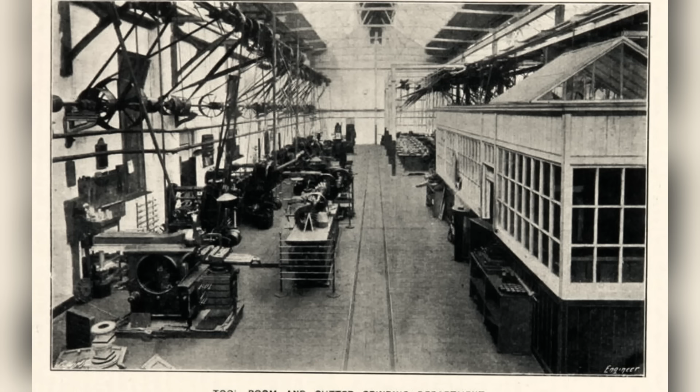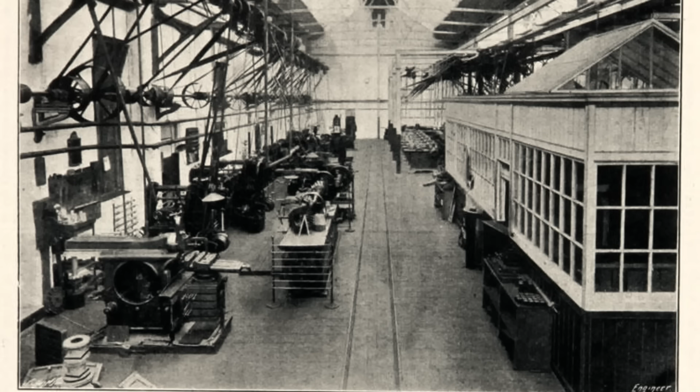Brown cut gear wheel patterns for the foundries around him, and he was good at it. By 1873, he'd narrowed his focus to gear systems. By 1898, nearly 40 years in, the firm had become one of the first in Britain to specialise in machine-cut gears. That sounds like a small thing. It wasn't. A gear cut by machine ran quieter, stronger, and truer than anything a man could file by hand, and the world was filling up fast with machines that needed exactly that: looms, lifts, motor cars, ships.

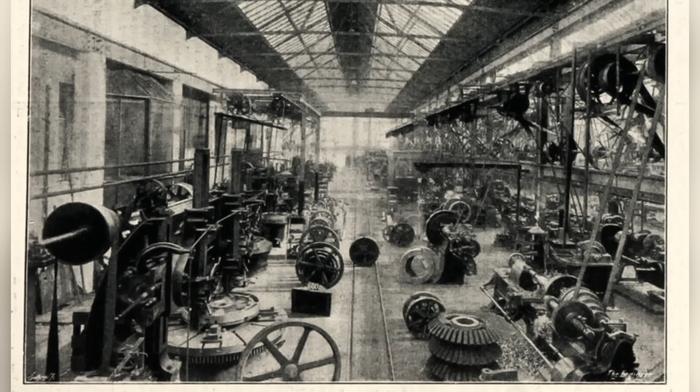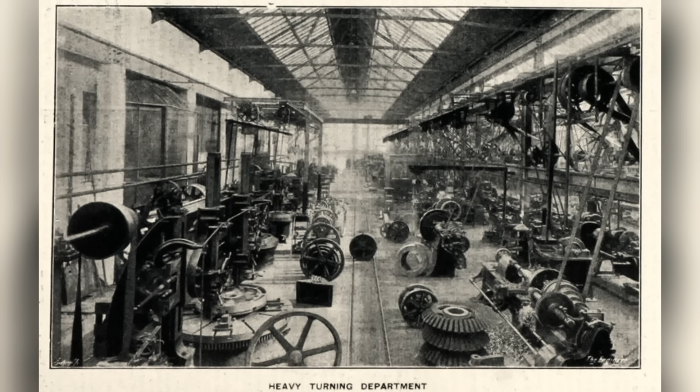In 1902, the company moved to a site on the edge of town called Park Works. It's still there today, more than a century later, and everything that followed - the tractors, the tanks, the sports cars that James Bond would one day drive - grew out of that one stubborn obsession with making a wheel turn smoothly against another wheel. When the founder died, around the turn of the century, his sons Percy and Frank took the business on. They were ambitious men, and they pushed the firm forward. Complete gear units now, and the machines to cut them, and bearings, shafts, worm drives.

The company was prospering, and it was into this family, onto this exact patch of Huddersfield ground, that the man who would build the empire was born. His name, too, was David Brown, the grandson. Born on the 10th of May 1904 at Park Cottage, a house that stood inside the 17-acre Park Works site.

He wasn't born near the works, or in the town the works supported. He was born within its walls. The first sound he ever heard, in all likelihood, was the low hum of his own family's machinery, carried across the yard. His father was Francis Edwin Brown, Frank, a director of the firm, and, in his own right, a real pioneer of machine-cut gearing.

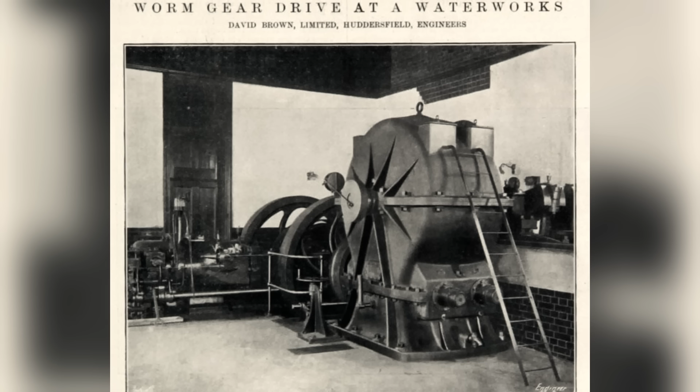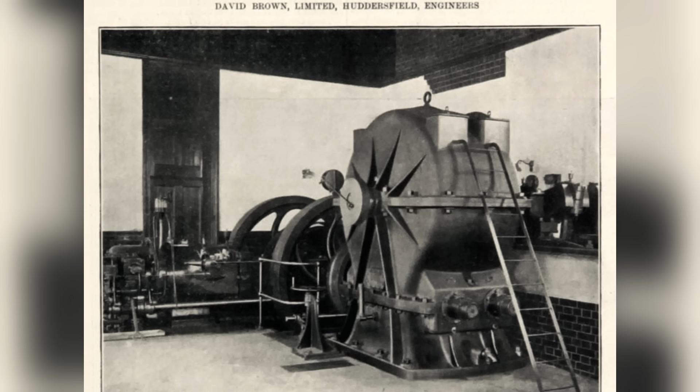His mother was Caroline, born a Brooke, and she was no ordinary Edwardian mother. She was, by repute, the first woman to drive a motor car in Huddersfield, and possibly the second in the whole of Yorkshire. In an age when most women never sat behind a wheel in their lives, young David's mother was out on the roads, hands on the controls. The boy came by his love of machinery honestly, and from both sides of the family.

But the moment that tells you who he would become came when he was very small. The firm, restless as ever, had branched into building its own motor cars, odd little two-stroke machines they called valveless, made between 1908 and 1915. And the engineer who tested them was a man named Frederick Tasker Burgess. Burgess would later help design the engine of the 3-litre Bentley, one of the most celebrated cars of the 1920s. But in those years he was simply the works test driver, and he'd take the founder's grandson out on the runs, the little boy perched beside him on a wooden soapbox seat. Burgess taught him to drive.

The child's legs were too short to reach the pedals, so they bolted blocks of wood to the controls to bring them up to his feet. A boy who learned to drive before he learned his times tables, taught by a man who would build a Bentley. That was the world David Brown grew up inside.

He went to King James's Grammar School in Almondbury, then on to Rossall School over the border in Lancashire, where, in a detail that says everything about him, he bought shares out of his pocket money. Most boys spent their allowance on sweets. This one was quietly building a portfolio.

You'd expect the heir to such a firm to walk straight into a comfortable office. He did the opposite. In 1921, aged just 17, he started at the very bottom, as an apprentice on his own family's shop floor. And he didn't arrive in any chauffeured car. He cycled 6 miles each morning to be at the gates by 7:30, the same as every other apprentice lad, his breath fogging in the cold air coming off the Pennines.

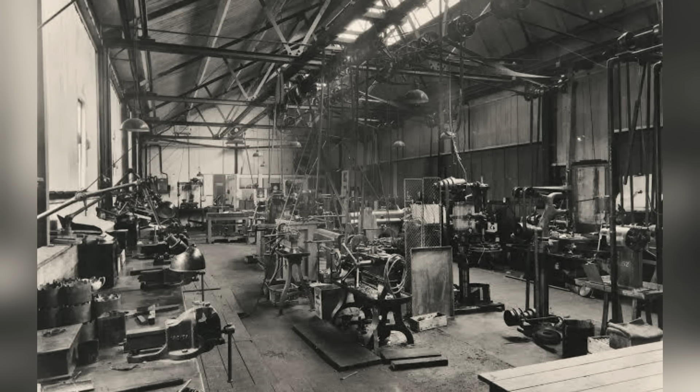Then came the moment that handed him the controls for real. In 1931, his uncle Percy died, and David Brown, at just 27, became managing director. 2 years later, when the joint managing director W.S. Rowe died as well, he took sole command of the entire firm. He was not yet 30, and he ran the lot.

He governed by a single principle, one he'd repeat for the rest of his life: get a good man, and let him get on with it. If he is no good, get another man. But if he is good, support him. It's a plain creed, the kind of thing that fits on the back of a wage packet, but it built one of the great British engineering firms of the 20th century, and it shaped a culture at Huddersfield that lasted for decades. Find brilliant people, trust them, leave them be.

And he was, in every fibre, an adventurer. In time, he'd become a polo player, good enough that a club still competes for a trophy in his name, a joint master of foxhounds, a racehorse breeder whose horse Linwell would one day win the Cheltenham Gold Cup, and a qualified pilot with his own private airfield at Crosland Moor and his own aeroplane. The man could not sit still, but all of that lay ahead.

Because in the middle of the 1930s, David Brown's restless mind landed on a single problem that would change British farming forever, and it arrived in the shape of a difficult, brilliant Irishman.

Chapter 2. The Irishman and the Handshake.

By the mid-1930s, David Brown had bought himself a farm, and a man who runs a gear works and works his own land spends a great deal of time thinking about one machine above all others, the tractor. In 1936, he went into partnership with Harry Ferguson.

Ferguson was a genius. There's no other word that fits. An Ulsterman with a mechanic's hands and an inventor's absolute certainty. He had cracked something nobody had quite solved before: how to make a tractor and its implements behave as a single machine rather than two things lashed together.

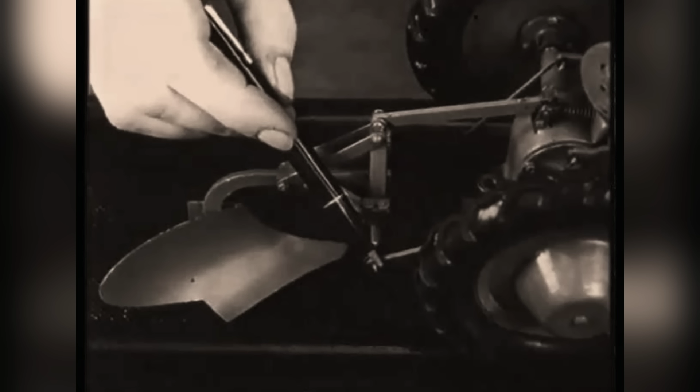What Ferguson didn't have was anyone who could build it properly, at quality, at scale.

What David Brown had was a world-class gearworks and an engineer's instinct for turning an idea into a thing you could sell by the thousand. So the two men joined forces, and in a corner of the Park Gearworks in Huddersfield, they began to build the Ferguson-Brown tractor. It was a landmark machine, the world's first production tractor with hydraulic lift and that converging 3-point linkage, a design concept so good that, within a single generation, very nearly every tractor on Earth would copy it.

The first 350 or so used a bought-in Coventry Climax engine. The later ones used an engine of David Brown's own design. In all, around 1,350 were built.

It should have been the beginning of a beautiful partnership. It became the opposite, because Ferguson's brilliance came welded to his temperament. He was mercurial and unbending, convinced he was right in every particular, and a hard man to share a workshop with, and none of that sat easily with the steady, methodical Yorkshireman.

There was a deeper fault line too. Brown had studied the tractor he was building with a cold engineer's eye, and concluded it could be better. It could be made more cheaply. It could be improved. Ferguson didn't want it improved. He wanted it built precisely as he had drawn it, down to the last bolt.

So David Brown did something that tells you everything about his nerve. He began designing his own tractor, in secret. He gave it a code name, VAK1, Vehicle, Agricultural, Kerosene. While the partnership with Ferguson still officially held, Brown's own people were quietly drawing up a machine that would make Ferguson unnecessary.

It was an unglamorous, relentless contribution, and it never stopped. The second job was the war itself, and here the scale of what one Yorkshire firm achieved is almost hard to credit. They made over 500,000 gears for aero engines, for the Rolls-Royce Merlin and the Bristol Hercules. The Merlin was the engine of the Spitfire, the Hurricane and the Lancaster, and David Brown's gears were turning inside them in the skies over southern England in 1940 and over Germany in the years that followed.

They built more than 10,000 tank transmissions, and here the story turns on a single brilliant idea, patented back in 1935. A few years before the war, David Brown's engineers, working with Henry Merritt of the Woolwich Arsenal, had devised something called the Merritt-Brown controlled differential steering system. It was a way of steering a tank by using its gears to drive one track faster than the other, smoothly and under power, instead of crudely slamming a brake on one side.

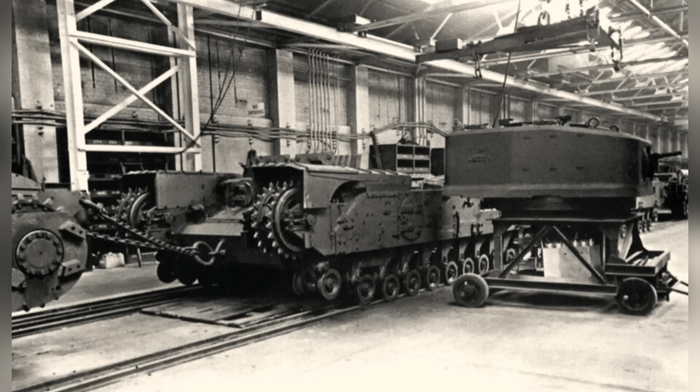It transformed the way a British tank handled, and it went into the great armoured beasts of the war in the years after: the Churchill, the Centurion, the Conqueror, and the monstrous 78-ton Tortoise. When a Churchill slewed round under fire to face the enemy, it did so on a system born in Huddersfield.

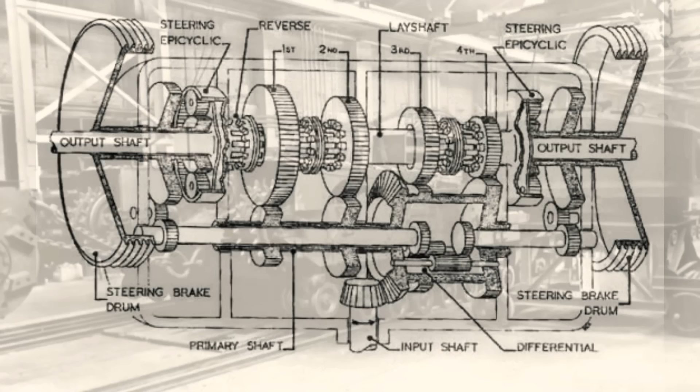Nor was that the end of it. The foundry at Penistone, opened in 1935, poured armour plating for the Churchill and the Cromwell, cast the steel casings for the enormous blockbuster bombs, and, in one of the war's most extraordinary feats of engineering, cast cabling for Pluto, the pipeline under the ocean that pumped fuel beneath the channel to keep the armies supplied after D-Day.

Meltham itself even built aircraft tugs for the RAF, the squat little machines that hauled fighters and bombers around the airfields in all weathers. A valley full of tractor builders had become, almost overnight, one of the arsenals of a nation fighting for its survival, which made it a target.

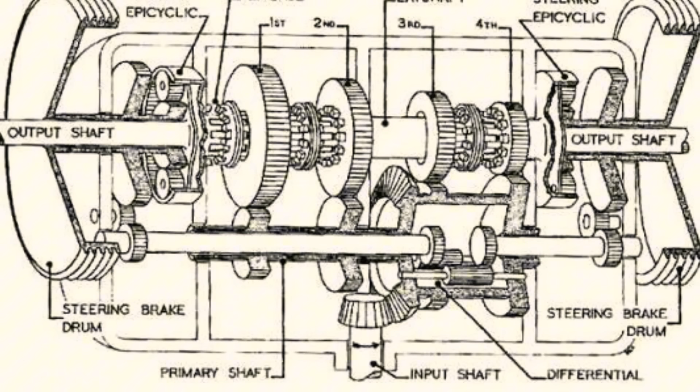The Luftwaffe knew perfectly well what places like Meltham were producing, and a works turning out tank steering gear and Merlin components was precisely the sort of thing the bombers came hunting for. This was the gravest threat the company had ever faced. Not a rival, not a slump in the market, but obliteration from the air. A single accurate raid could have ended everything in a night.

And here, the valley itself fought back. Meltham Mills sat deep in a fold of heavily wooded country, hard to pick out from above and harder still to bomb with any accuracy. The firm pressed that natural advantage for all it was worth. They camouflaged the works, and built mock wooden buildings out on a nearby moor, decoy factories, dummy halls, set up deliberately to draw the bombers away from the real one tucked down among the trees.

And it worked. The propaganda broadcaster known as Lord Haw-Haw, beaming his sneering bulletins into British homes from Berlin, twice announced to the nation that Meltham Mills had been destroyed. Twice he was wrong. The works was still standing, still humming, still cutting gears for Spitfires and steering systems for Churchill tanks, hidden in its green Pennine Valley, while the man on the wireless told the country it was rubble.

By the time the war ended in 1945, David Brown's firm had proved something about itself that no peacetime success ever could. It had faced a threat to its very existence and survived by outthinking the enemy. It had supplied the engines that won the air war and the tanks that won the ground war, from the products of its own benches, and it had done all of it while keeping the tractors coming, so that the moment peace returned, it was perfectly placed to do what it did best.

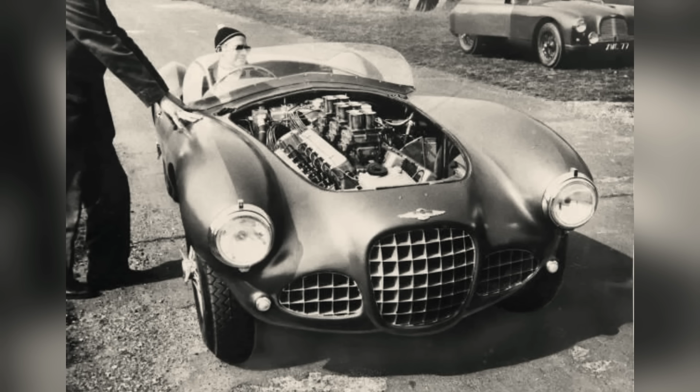Brown married the Bentley-designed six to the Aston Martin chassis, and out of that union came a line of cars that bore on their bonnets his own initials: DB, David Brown, the DB1, the DB2, the DB3, the DB4, and then, most famously of all, the DB5, which became, after a film studio bolted machine guns and an ejector seat to a prototype and handed the keys to James Bond in Goldfinger in 1964, the most famous car in the world.

There is a delicious irony buried in all this, and it's worth knowing. For all that his initials adorned the most glamorous sports cars on earth, David Brown's own personal motor car was a rival Jaguar. The man who built the dream drove something else to work.

But here is the detail that ties the whole story together, the one most people never learn. The Aston Martin engines were designed and built at Meltham. The same valley, the same skilled hands, the same Yorkshire engineering culture that turned out tractors for the fields also turned out the power units for the cars of fantasy. The chief engineer of the tractor division oversaw the cars as well.

So when you picture the DB5 sliding through the streets of Geneva on the silver screen, understand that its heart was forged in the same Pennine works where, a few hundred yards away, other men were building machines to plough the soil of Lincolnshire. One man, one family firm, leading the world, at the very same moment, in both the most humble of machines and the most exotic.

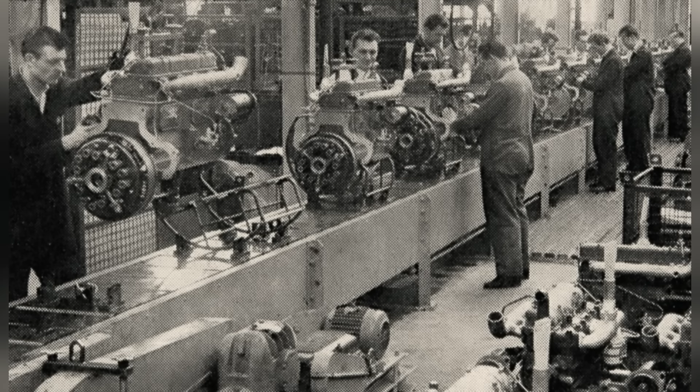That was the scale of what David Brown had become. But the cars, glamorous as they were, never the heart of the empire. The cars, in truth, mostly lost money, kept afloat by the engineering divisions that actually paid the bills. The real story, the one that fed families across half of Yorkshire and filled the fields of 100 countries, was the tractors, and the tractors were about to enter their golden age.

Chapter 5. Orchid White and Poppy Red.

To understand what Meltham was at its height, you have to walk in through the gates on an ordinary working morning. The works hooter would sound across the Holme Valley, the sound bouncing off the wooded slopes, and from the terraced streets of Meltham and the villages strung along the tops. The men would come, on foot, on bicycles, the steady human tide that an industrial town runs on.

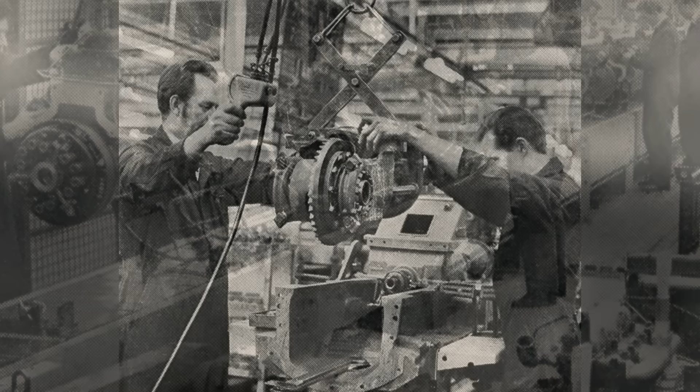They clocked in, and then they walked into one of the most complete engineering operations in the country, where a tractor was not assembled from bought-in parts, but very nearly made, from the raw metal up, the way David Brown himself had learned the trade.

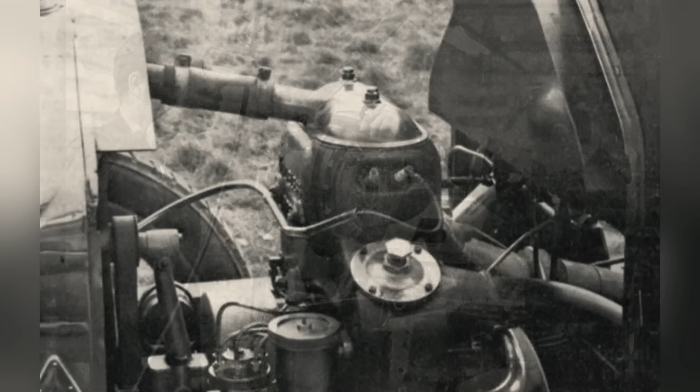Follow the work as it moved through the place, and you follow the whole genius of the firm. It began, as everything at David Brown began, with the gears. In the machine shops, the great gear-cutting machines turned, throwing off fine blue spirals of swarf and the sharp, oily smell that got into a man's clothes and never quite left them.

This was a gear company that built tractors, and it showed in every transmission that left the place. The gearboxes were simply the best in the business, and the men who cut them knew it, could feel a tooth profile that was right, could hear when a hob was cutting clean. The gears went away to be hardened and ground until they ran true, because a David Brown gearbox was the thing the whole reputation rested on.

The castings came through from the foundries, the heavy iron of the engine blocks and transmission housings, sand cast, cleaned and machined. The engines were built up on the benches and then taken to the test cells, where every single one was run and run hard before it would be passed, the bark of the exhausts echoing through the building so that you could stand outside the cell and know, by ear, whether the unit inside was healthy.

The great presses shaped the bonnets and the bodywork, the crash of them setting up the baseline rhythm that the whole works moved to. And then came the part that every old Meltham man remembers, the part that turned a machine into an icon. The paint.

Orchid white for the bonnet and the bodywork. Poppy red for the wheels and the mechanical parts beneath. It is one of the most beautiful liveries ever put on a working machine, and it was beloved. The white and red David Brown became as much a part of the British rural landscape as a dry stone wall or a chapel on a hillside.

There is a story about how the firm came to its earlier red, and whether it's gospel or legend hardly matters, because it's true to the man. When the arguments broke out over what colour the tractors should be, David Brown is said to have pulled off his own red hunting jacket, thrown it over a machine and said, 'Paint it that colour.' An industrialist settling a design committee with the coat off his own back. Pure David Brown. The machines that wore those colours became legends in their own right.

Through the 1950s, the range broadened in every direction. There was the little 2D row crop machine, built for the market gardener and the smallholder. There were the economy models, the 25 and the 30, for the farmer counting every shilling. There was the 6-cylinder 50D, built big for the wide farms of the New World and the export markets that David Brown was already chasing hard. The firm could build small or large, cheap or powerful, for the hill farm or the prairie.

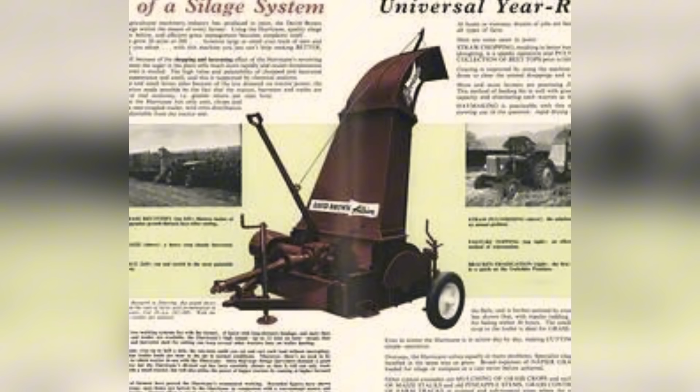And in 1955, David Brown reached across the Pennines and bought Harrison, McGregor and Guest of Leigh in Lancashire, makers of Albion Farm implements, so that the firm could sell a farmer not just the tractor, but the things he hung off the back of it. From that day, the company badge carried both the white rose of Yorkshire and the red rose of Lancashire, side by side. A small heraldic detail. But it told you that this was a firm rooted in something, in a place, in a history, in a pride of region you could not buy and could not fake.

Chapter 6. The Single Lever.

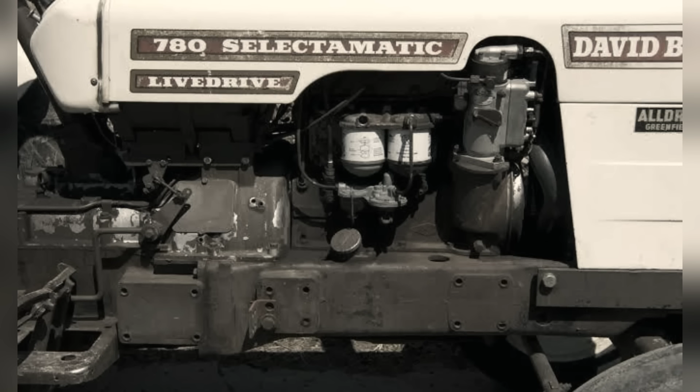The defining machine arrived in October 1965, and it was called the Selectamatic. To the eye, it was the familiar white and red. But underneath sat a piece of genuine cleverness, a hydraulic system controlled by a single lever, where rival tractors needed a fistful of separate controls. Pull that one lever through its positions and the tractor would lift, lower, hold and respond to the load, all from one hand. It drew directly on everything the firm knew best. Deep, patient mastery of gears and hydraulics, the inheritance of 100 years of cutting metal in Huddersfield.

The smallest of the range, the 770, came with a 12-speed gearbox as standard, 12 speeds, on a tractor a small farmer could actually afford. Only a gear company would have thought it worth doing. Only a gear company could have done it so well.

There were 3 machines at the heart of it, the 770, the 880 and the 990. And the 990 became the most popular David Brown ever built, more than 40,000 of one variant alone, at one point accounting for half of everything Meltham produced. Across all its forms, more than 67,000 of that family of machines rolled out of the valley.

These were not show ponies. They were working tractors, bought by working men, and they earned their owners' loyalty the hard way, by starting on a cold morning and pulling all day. These were the years the works was at its absolute best, and at its best it was a world the men inside it would remember in complete detail for the rest of their lives.

The smell of cutting oil and hot metal that met you at the gate, the din of the machine shops, the rhythmic crash of the presses, the bark of the test cells, the way the whole building seemed to hum at a single pitch when everything was running, and above all the particular quiet pride of a man who could look at a finished tractor in Orchid white and know which part of it had passed through his own hands. The gear he'd cut, the engine he'd built, the seam he'd welded. On a Friday, the wage packet, earned, solid, the foundation a family and a whole village were built on. Because Meltham was not just a place where men worked, it was the reason the place existed at all.

It had been ruined by the costs of developing a new jet engine, the RB211, a magnificent piece of machinery that ran catastrophically over budget before it ever earned a penny. The most trusted engineering company in the country went bankrupt.

The shock of it ran through the whole of British industry like a crack through ice, and it ran, specifically and fatally, through Lloyd's Bank, because Lloyd's had lent heavily to Rolls-Royce, and now Lloyd's had lost a great deal of money, and a bank that has just lost a great deal of money does one thing above all others. It gets frightened. It looks again hard at everyone else it is lent to. And among the engineering customers on its books, with an overdraft of around £30 million, sat the David Brown Corporation.

A man who was there understood exactly what happened next. Tom Lazenby, a senior David Brown figure, set it down plainly years later. When Lloyd's lost those large sums on the Rolls-Royce affair, he recalled, they took a hard look at all their other engineering-based customers. The David Brown overdraft was around £30 million, and the bank called it in. On demand. On demand. Three words that decided everything.

Sir David negotiated a way out for the short term. He was a formidable man, and he bought a little time. But as Lazenby put it, it was obvious that something had to go. Hold the cruelty of this in your mind for a moment.

The tractor division was not the problem. The tractor division was the jewel. Profitable, world-beating, exporting 80% of its output, the third largest in Britain. The wider David Brown Corporation had other divisions that lost money, and the glamorous Aston Martin cars had always lost money. But the bank's panic was not about whether a business was good, it was about getting its £30 million back. And the surest way to raise £30 million quickly was to sell the most valuable thing you owned. The most valuable thing David Brown owned was the tractors.

The first change the Meltham men noticed was small and almost comic, and, looking back through everything that came after, entirely ominous. It was the men with stopwatches. As one former apprentice engineer recorded, in the memoir that preserves so much of this story from the inside, things soon began to change after the sale, and one of the very first was the flood of time and motion men who appeared in various departments, upsetting a fair few of the workers in the process.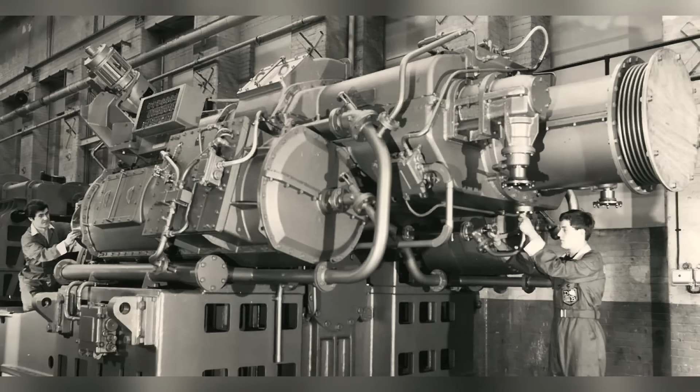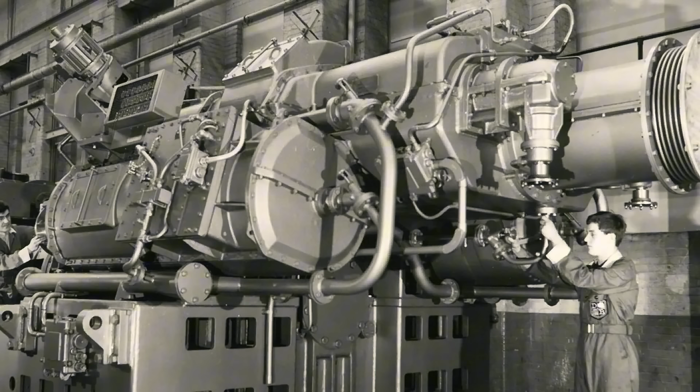Picture what that meant in that particular place. Here was a works built from its foundations on trust, on David Brown's own lifelong creed of getting a good man and letting him get on with it. And now it was filling up with strangers holding clipboards and stopwatches, standing at a man's shoulder, measuring to the second how long a Yorkshire engineer took to do the job he'd done well for 30 years. The whole philosophy of the place was being quietly turned inside out.

The men knew it. They didn't yet have the words for what was happening to them, but they felt the cold coming in under the door, and within about a year of the sale, the truth that the accidental headline had foretold began to show itself in earnest. It was announced that David Brown was to be merged, really merged this time, not in the soothing sense of the prospectus, with that other Tenneco asset, J.I. Case, the American rival, the thing the Houston conglomerate had owned all along, sitting 3,500 miles away in Wisconsin.

And once two tractor companies sit inside one owner, a process begins that has only one possible end. The owner does not want two of everything. It does not want two ranges of broadly similar tractors competing for the same buyers. It does not want two liveries, two dealer networks, two badges, two names.

The logic of consolidation is patient, and it is utterly without malice, and it is therefore impossible to argue with. It does not hate Meltham. It does not love Meltham. It simply does sums, and the sums, in the end, did not need a works at the bottom of a Pennine Valley and a works beside a Wisconsin railroad, both doing the same job.

The men of Meltham were now working, though most of them, getting on with the day, did not yet truly grasp it, for an organization that would one day, by the cool arithmetic of consolidation, decide they were surplus to requirements. And the first sign of that decision, the first of three deliberate, dateable blows, did not come for their jobs. Not yet. It came, first, for the thing they loved most about the tractors they built. It came for the colour.

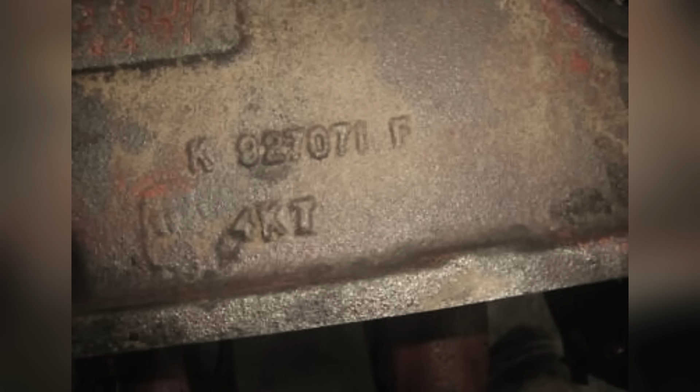Think for a moment about what that does to a man on the floor. You are still at the same bench you have stood at for 30 years. You are still cutting the same superb gears, still building a machine to the same exacting Yorkshire standard your father held to before you. Your skill has not changed. Your pride in it has not changed. But the thing you now hand to the customer at the end of it no longer carries your name.

It carries the name of an American company you have never seen, in a town you could not point to on a map. To the men who built them, a tractor that no longer said David Brown was, in a real and wounding way, no longer truly theirs. It was just work now, just a machine with somebody else's name on it, made by hands that were no longer being credited for the making.

There was even a smaller indignity folded into the same change. The 94 series castings, which had been power red, were now switched again, this time to black. The official reason was sound and modern enough: new government legislation on the lead chromate content of paint and the considerable cost of upgrading the works paint plant to comply with it. A defensible decision, like all the others. But some of the men, watching their tractors turn from white and red to red and black to plain, sombre, dark, suspected a humbler and less flattering motive underneath the legislation. Black, after all, hides an oil leak rather better than red does.

Whatever the truth of the paint, the meaning of the deleted name was beyond any dispute. The Americans had stripped the British soul out of the machine and left the working body behind to keep producing. The brand had been hollowed out from the inside while still walking around, and a brand whose own owner has quietly removed its name from its own products is a brand that owner has already, somewhere in its accounts and its plans, decided it does not really need to keep.